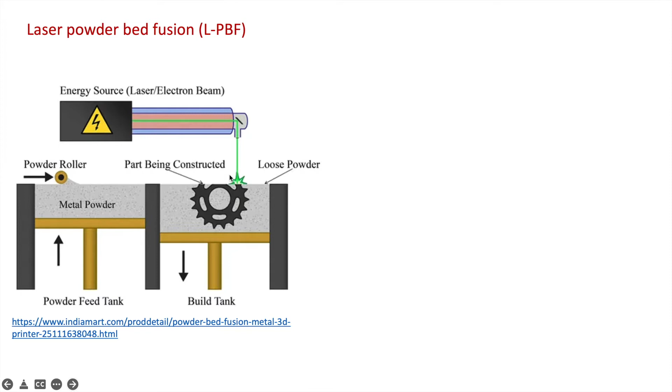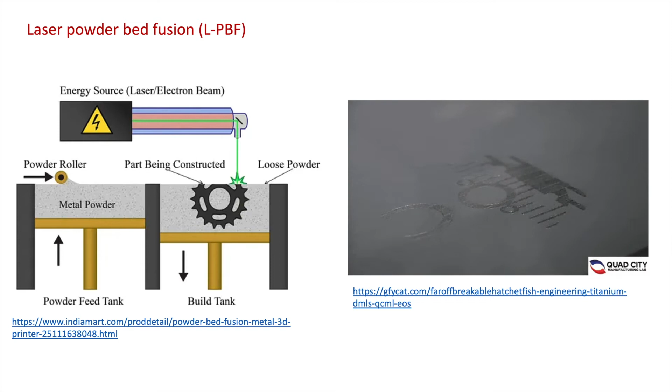Compared to the laser powder bed fusion technique you've seen in the previous slide, the powder jet DED has one major advantage. In this setup, you have multiple nozzles. Therefore, during the printing process, by changing the powder feeding rate, you can alter or tune the chemical composition of the printed components. Here, you can easily introduce a composition gradient in the printed component, which is not easily achievable using the laser powder bed fusion technique.

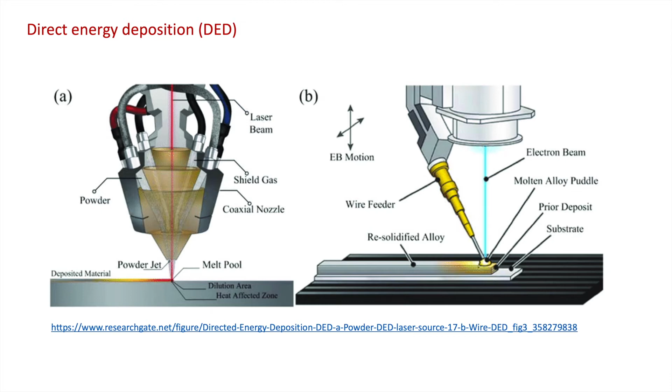In this approach, a wire is fed to the printed component. Either electron beam or high energy laser will melt the wire, and after solidification, this process continues in a layer by layer fashion. Just now, we have mentioned the major advantage of using DED compared to laser powder bed fusion. Then what is the major disadvantage of using DED? The main drawback of DED is poor spatial resolution.

Since personally I'm more familiar with the laser powder bed fusion technique, for the rest of the video we'll focus on this technique only. As a student or researcher, you may wonder why people are interested in metal 3D printing. One obvious advantage is that you can use 3D printing to create complicated shapes and geometries. More recently, Morris Wang at Lawrence Livermore and his team discovered that by doing 3D printing, you can actually achieve mechanical properties that were not attainable using conventional processing.

They used stainless steel 316 as the model material. The green curve shows the stress and strain behavior of the as-cast SS316. The gray curve shows the wrought sample mechanical behavior. Both the blue and the red curves are from 3D printing. You can tell the 3D printed stainless steel 316 has better strength and ductility compared to the as-cast and the wrought samples. On the right is the classical banana curve showing the trade-off between yield strength and uniform elongation.

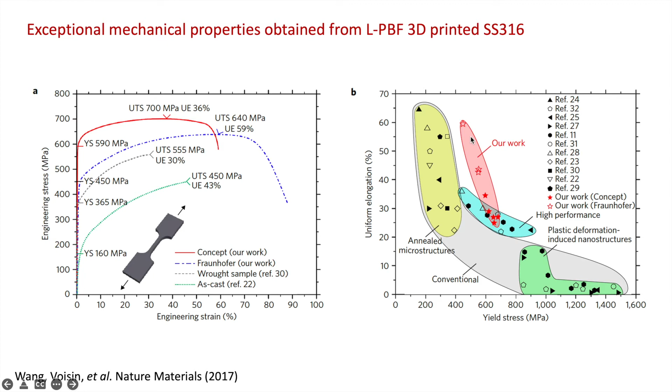The results obtained by Morris's group showed that they were able to push into the empty space of this banana-shaped curve, which gives you a good combination of strength and ductility. The next question is why 3D printed metals show superior mechanical properties. The excellent mechanical properties are explained by the multi-scale strengthening mechanisms.

At the granular level, you see many high-angle grain boundaries and low-angle grain boundaries. When you have a closer look into the microstructure, you see these dislocation cell walls. The cell walls are about 500 nanometers apart, and they also can behave as strong dislocation barriers. Another interesting observation is those dislocation cell walls have different chemical composition compared to the matrix. They are rich in moly and chromium. That is an additional energy barrier to overcome when you try to deform the material.

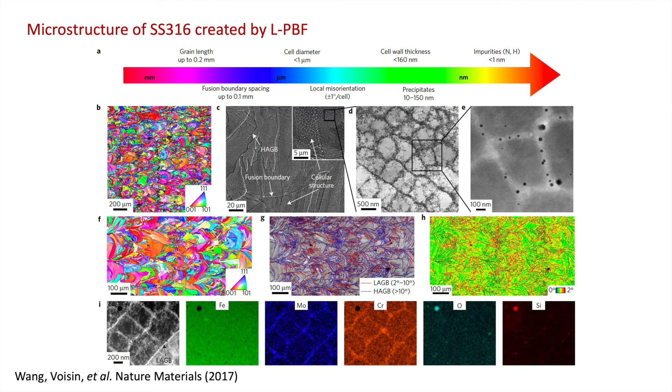One thing I like to point out is 3D printing is a complex process. By slightly changing the printing parameters, you can dramatically change the microstructure and the mechanical properties. I took the example from a paper published by Gokcekaya and co-authors. They investigated two parameters. One is the printing speed, and another is the laser power.

Based on the results, you can see a higher scanning speed and low laser power will give you a polycrystalline-like microstructure. An intermediate laser scanning speed will give you micro-lamellar structure. And high speed and high laser power will give you a single crystalline-like microstructure. One thing from this figure that you may notice is you see a lot of green. What this tells you is a lot of the grains printed by the 3D printing have a preferred orientation.

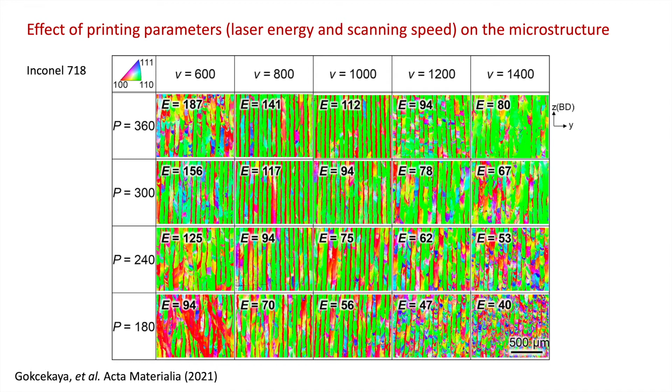Why is this the case? To answer that, we need to come back to the theory of solidification. When solidification happens, the grains don't grow randomly. There's a preferred growth direction. That's the 001 direction for FCC metals. During 3D printing, a lot of melt pools are created. These 001 grains solidify, then grow normal to the melt pool.

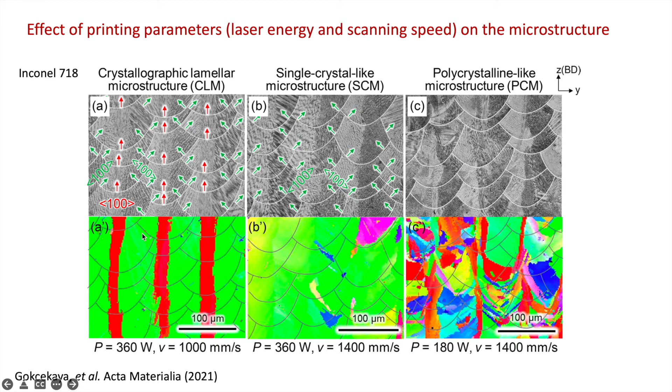At the center of the melt pool, these are 001 grains if you view from the top. If you look at the side of the melt pool, although those grains are growing in the 001 direction, if you view from the top, these are close to 011 direction. The 011 direction in EBSD is green. That's why you see a lot of green in the previous slide. One more thing you can learn from the slide is by carefully controlling the spacing of the melt pool, you can create the lamellar microstructure as shown in A, as well as the single crystal-like microstructure in B.

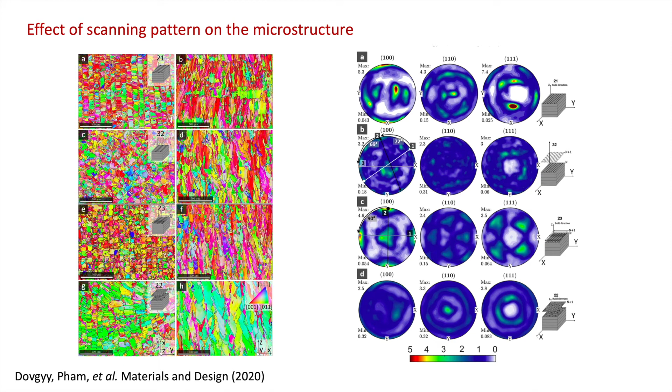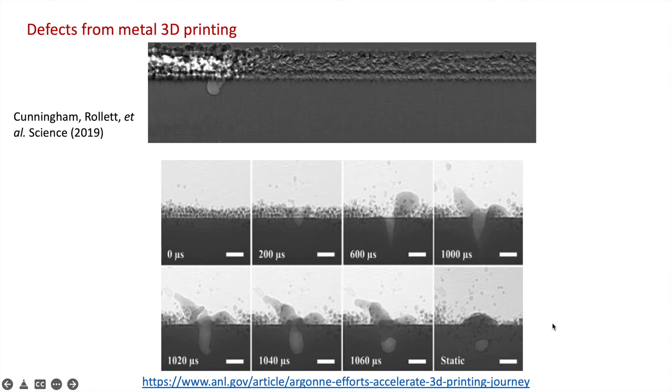In this example, we are lucky as the keyhole did not leave behind at the end of the printing. In some other cases, you may not be as lucky. In the example down here from the Argonne National Lab, as the liquid phase closes off, the keyhole or part of the keyhole actually got trapped inside the material. This will be a pore in the 3D printed metal and will be detrimental to the mechanical properties.

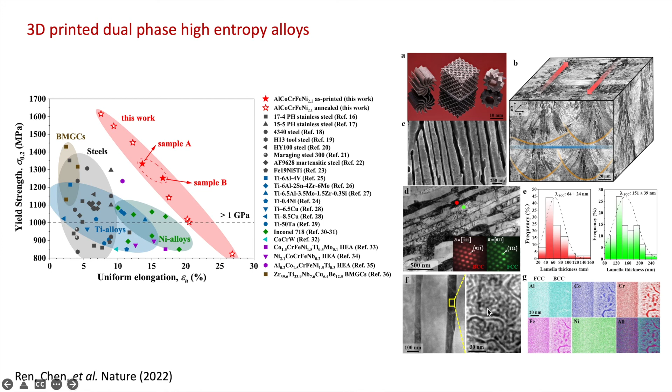Let's use steel screws as an example. Assuming all you have to make is only one screw, it's impossible to only melt the steel you need for one screw, and it's very difficult just to make one screw. Once you turn the machine on, millions of screws can be churned out. Therefore, on average, the more you make, the less it costs. In economics, it's called the economies of scale.